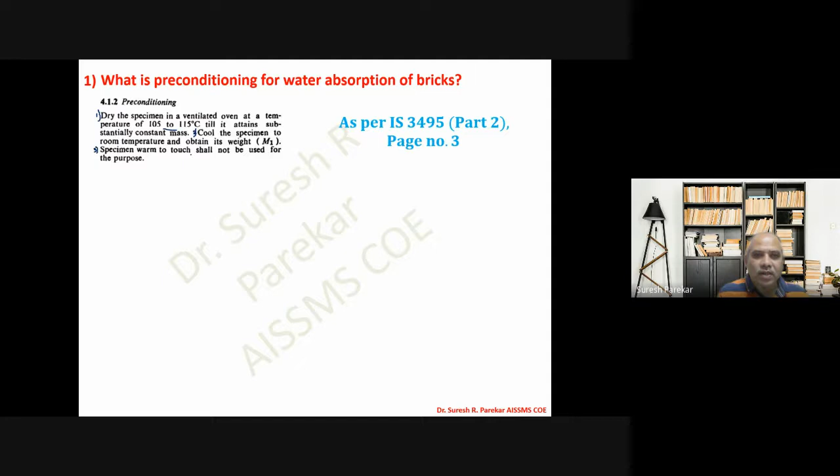So this is our second step. And the third step: specimen warm to touch shall not be used for the purpose. So these are the three steps we have to follow to prepare the specimen for water absorption of bricks.

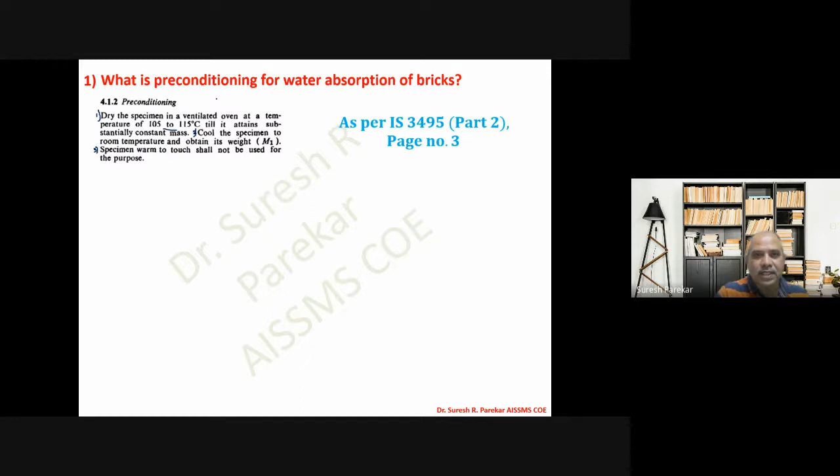Now, what is the procedure? Then you can see we have this procedure. Step one, immerse completely dried specimen, which is from preconditioning, in clean water at room temperature. So you have to keep in mind we have 27 plus minus 2 degrees, and that is for 24 hours. We have to keep the bricks for 24 hours.

Then second, remove the specimens and wipe out any traces of water with a damp cloth and weigh the specimen. This is the second step. And then we have the third step: complete the weighing 3 minutes after the specimen is removed from water, which is M2. So you can see M1 we have, that is the dried specimen. M2 we have, that is after keeping in water for 24 hours.

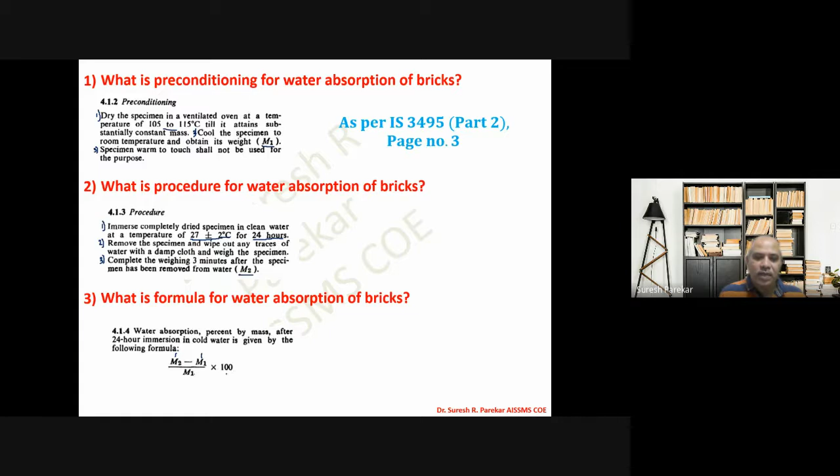Then what is the formula for water absorption of brick? We have water absorption percentage by mass after 24 hours immersion in cold water given by the formula: M2 minus M1 upon M1 into 100. M2 is weight after keeping in water for 24 hours, M1 is of the dried specimen, and that will give us the percentage of water absorption because we are multiplying it by 100.

Now, what is the criteria for water absorption? Once we get this value, then we have the bricks when tested in accordance with the procedure of part 2, 1992, after immersion in cold water. Water absorption shall not be more than 20% by weight up to class 12.5, and 15% by weight for higher class. So we have seen we have this class according to the compressive strength.

We have 11 classes. And then we are going to say up to 12.5 class, water absorption allowed is 20%, and for higher classes, that is greater than 12.5, 15% by weight for higher classes, above 12.5 class. So this 12.5 is the compressive strength of the bricks, and the 11 classes we have already seen in compressive strength.

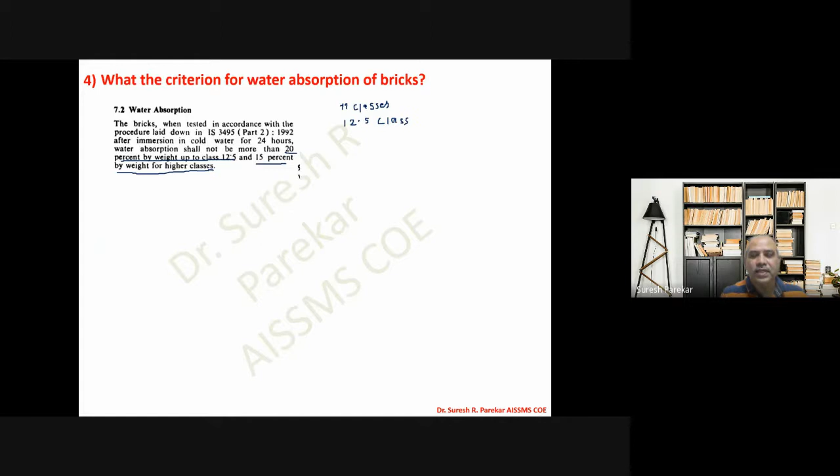What is the procedure for efflorescence? Now we can see the procedure that is given. This is IS 3495 part 3. Part 1 is compressive strength, part 2 is water absorption, part 3 is

efflorescence. Place the end of the brick in the dish. This is the first step. The depth of immersion in water is 25 millimeter. This is the first step. What is the second step? Place the whole arrangement in a warm, well ventilated room until all the water in the dish is absorbed by the specimen and the surplus water evaporates.

Cover the dish containing the brick with a suitable glass cylinder so that excessive evaporation from the dish may not occur. This is our second step: keep this in a ventilated room, and the specimen and dish will be covered by the glass cylinder so that excessive evaporation should not occur.

Third, when the water has been absorbed and bricks appear to be dry, place a similar quantity of water in the dish and allow it to evaporate as before. We have to do this process twice, then examine the bricks for efflorescence after the second evaporation and report the results.

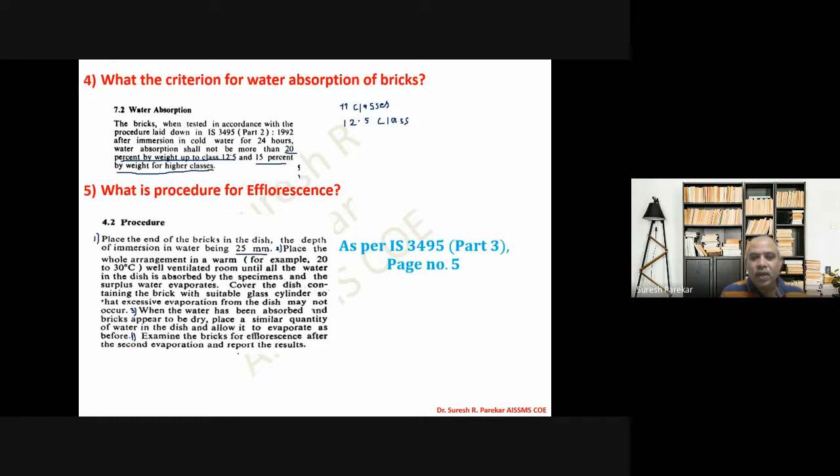Now, what are these results we are going to report? What are the liabilities of the bricks? It is given as nil when there is no perceptible deposit of efflorescence. Efflorescence is the soluble salts on bricks, the white deposit we see on bricks. Nil is when there is no perceptible deposit; slight is when not more than 10% of the exposed area of the brick is covered with a thin deposit of salts.

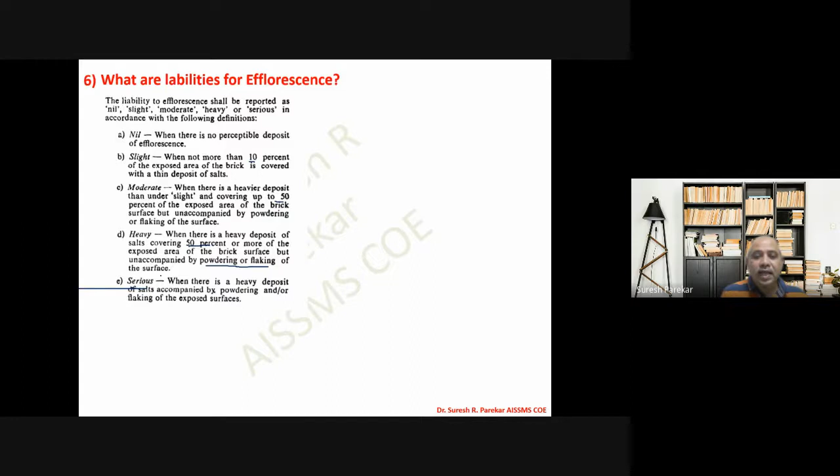Moderate is when there is a heavier deposit than under slight, covering up to 50%. So slight is not more than 10%, moderate is up to 50%, and heavy is more than 50%, but unaccompanied by powdering or flaking of the surface. When there is a heavy deposit along with powdering and flaking of the exposed surface, then the bricks are rated serious, and we have to think whether we can use it or not.

Now, what is the criteria for efflorescence? This is clearly given in IS 1077, the rating of efflorescence shall not be more than moderate up to class 12.5. So up to that class it shall not be more than moderate, meaning we can have up to 50%, and slight for higher classes, meaning it is allowed up to 10% for higher classes.

So that we have to check. If that criteria is not satisfied, we are not going to use those bricks. Keep in mind, up to class 12.5, moderate means up to 50% of the exposed area with deposits, and for higher classes, slight means only up to 10% of the exposed area.

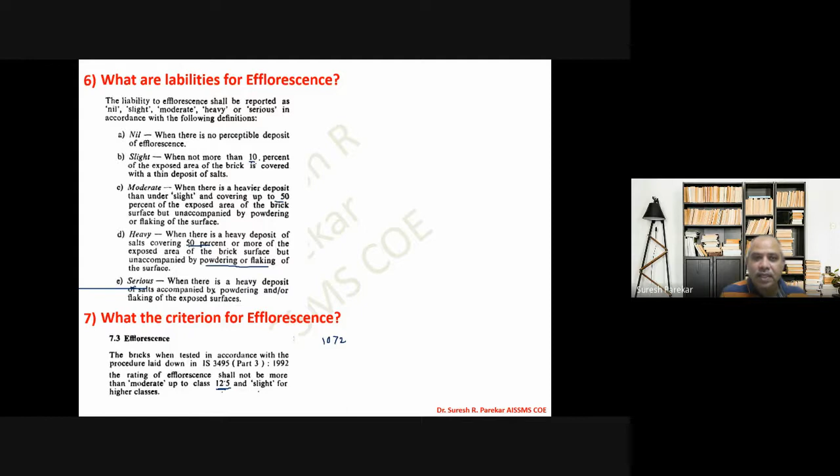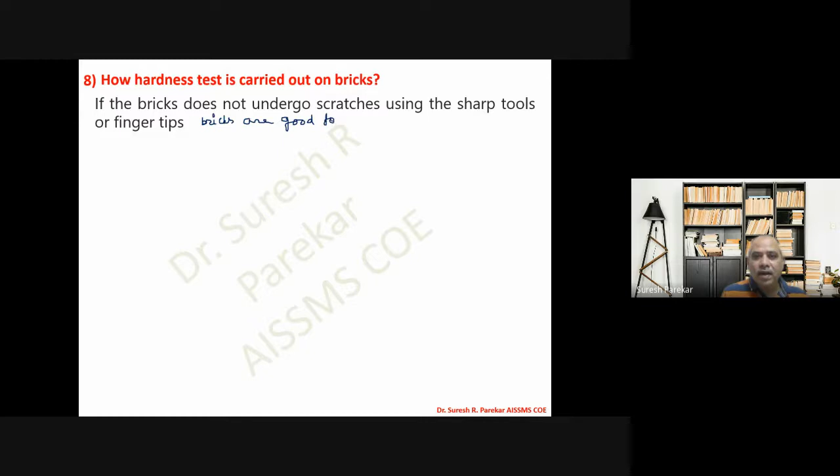Then how is the hardness test carried out? If the brick does not undergo scratches using sharp tools or fingertips, then we say the bricks are good for hardness. We can say the hardness test is satisfied, and we can use that brick against hardness.

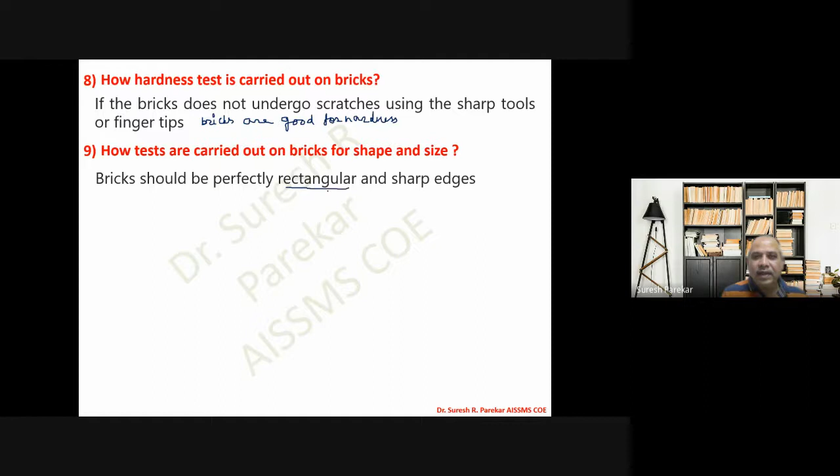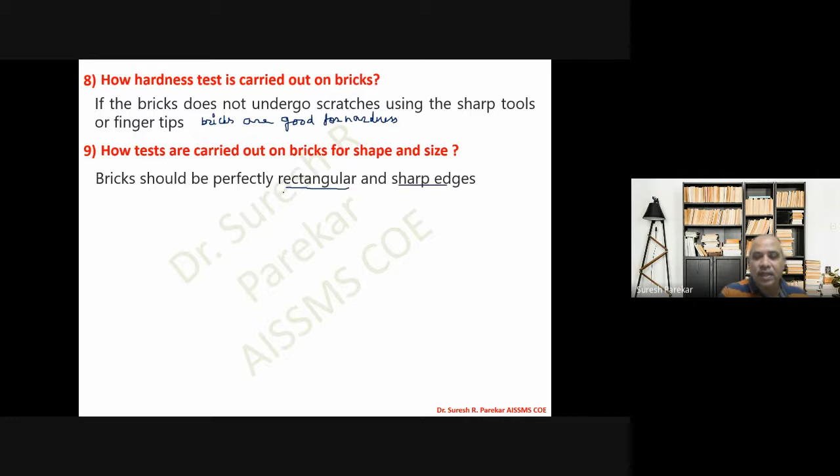Then how are tests carried out on bricks for shape and size? The shape of the brick should be perfectly rectangular with sharp edges, meaning all dimensions should be perpendicular to each other. We say it is perfect in shape and perfect in size. The size of the bricks should be 19 centimeters by 9 centimeters by 9 centimeters, and then we say the bricks are good in size.

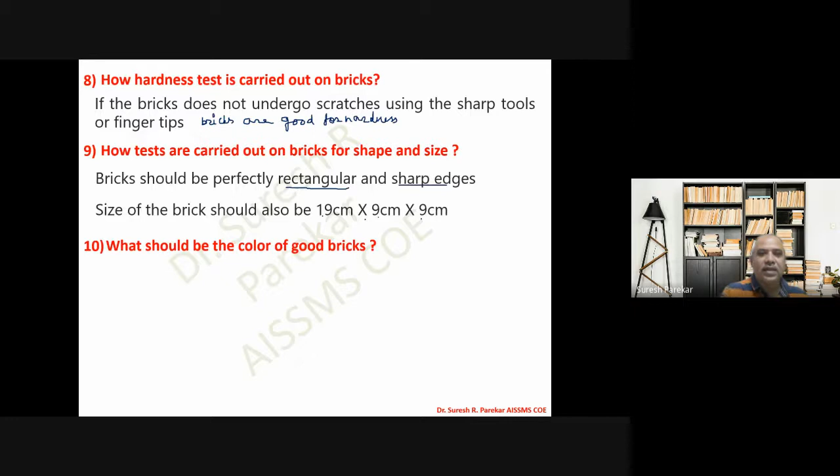Then what should be the color of good bricks? Bricks should have a uniform copper red color throughout, a reddish uniform color.

Soundness is tested on bricks by striking two bricks against each other. If it gives a bell ringing sound without breaking, then we say the bricks are good against soundness.

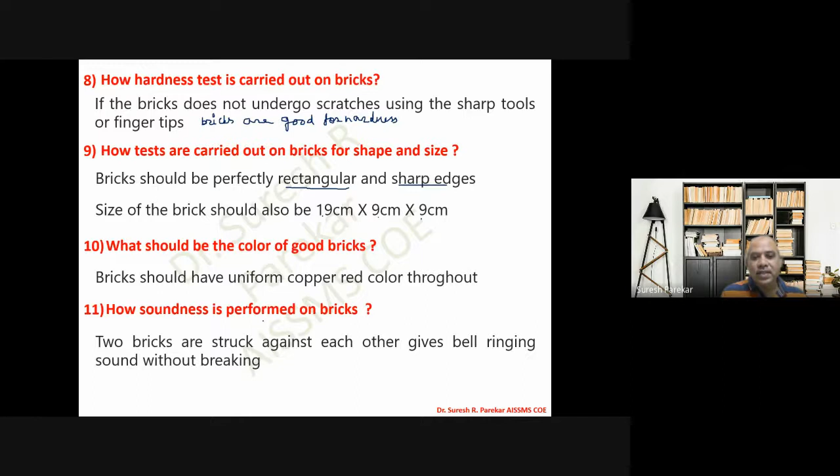So these are some questions related to bricks. This is the second part of the questions on brick; the first part we have already seen. So thank you.